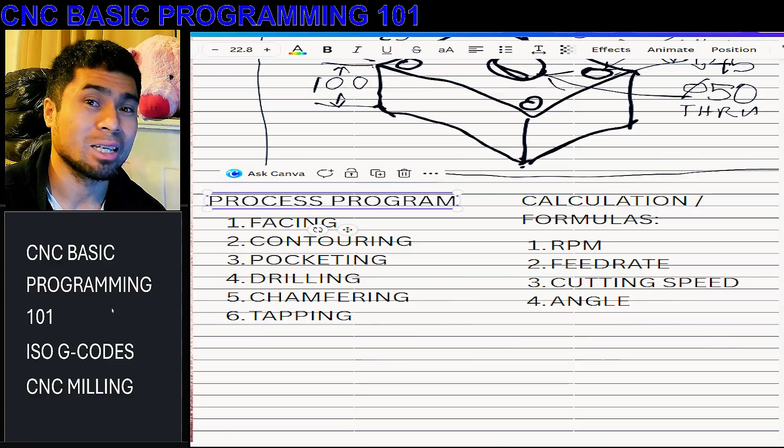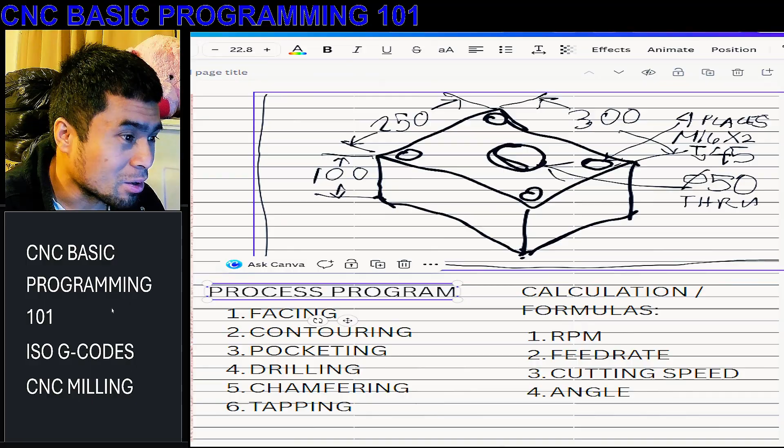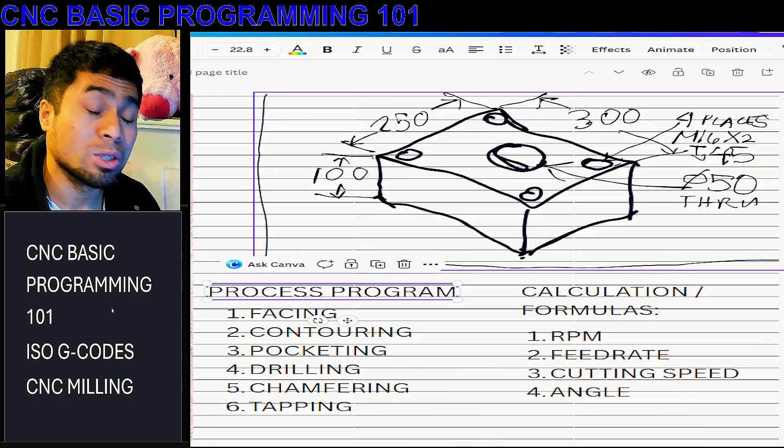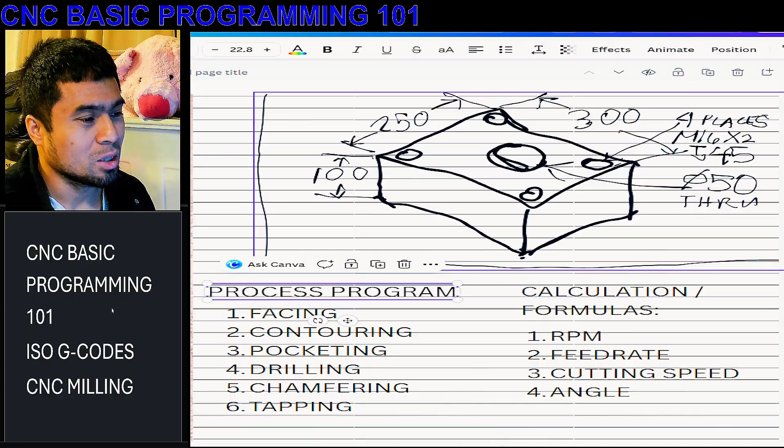So previously we tackled illustrating our sample part, which is this one. Blocks with 300 and 250, 100 height, with 4 M16 by 2 bolt holes, and in the middle a 50 diameter through hole.

And so this is process program, or probably let's change that to program operations. So I'll replace that one, like program operations. So whatever you want to call it, but it is called operations. So there is program operations.

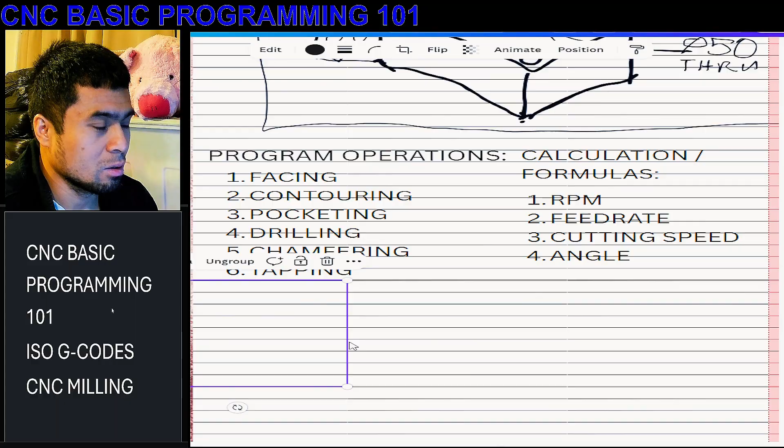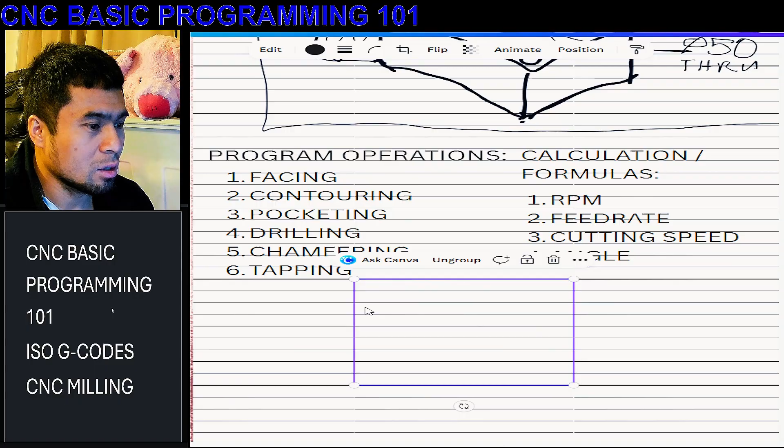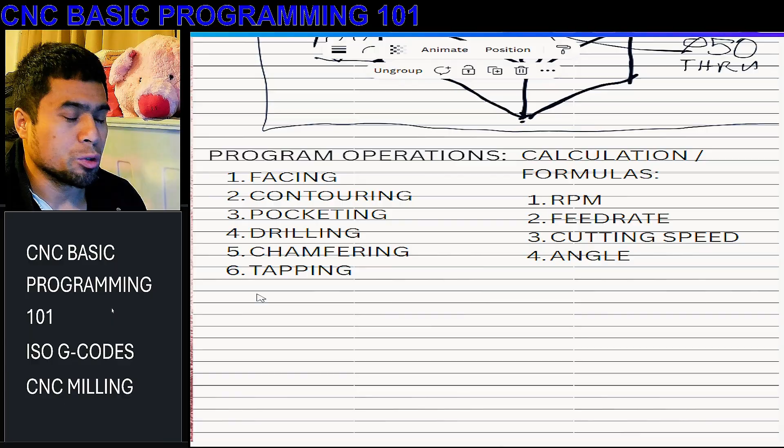Oh, yeah. Then that, what is that? How to remove that one? Like this probably, or like this probably. Okay. I'm still trying to get used to it, because sometimes I can still.

Okay, so let's call it program operations: facing, contour, pocketing, drilling, chamfering, tapping, and formulas. So you can learn about RPM, feed rate, cutting speed, angle. So let's include, because we are also doing tapping.

Why this one is... It's just all duplicated. Make it bigger. How to make it bigger? Like that? Oh yeah.

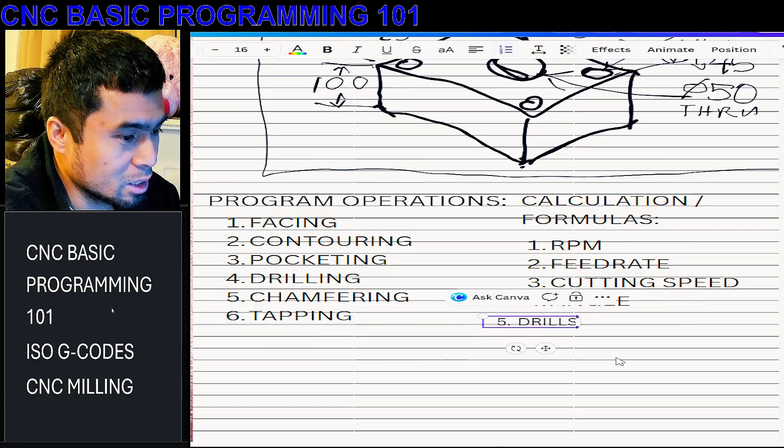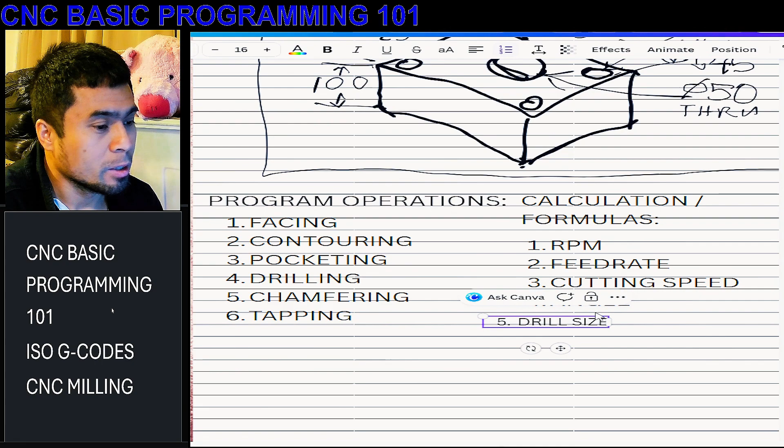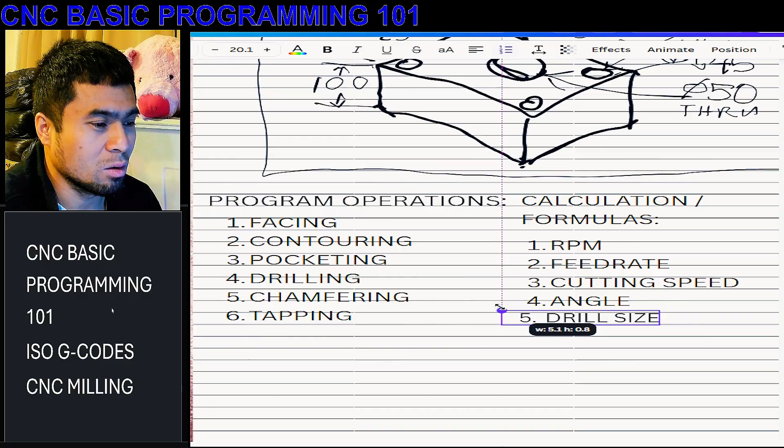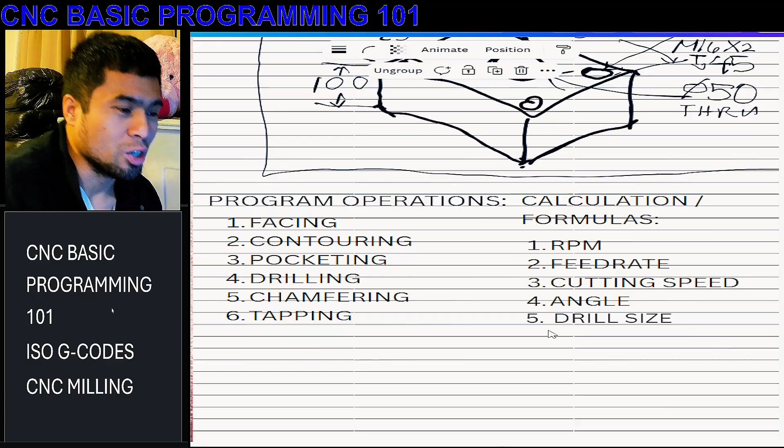So number 5, because we're doing tapping, probably calculation of tapping, our drill size diameter. How to calculate drill size in your tap. Let's transfer it nearby somewhere here and make it a little bit bigger so you can easily read it. How to get the drill size, diameter of your drill when you're doing tapping.

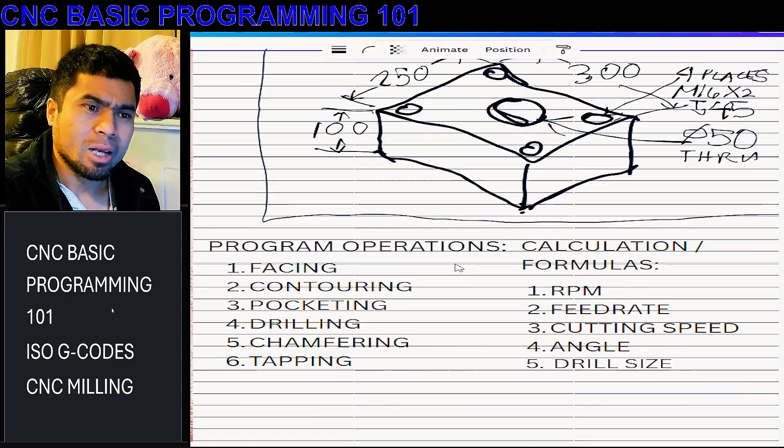So now, before we start the program operations, I want you to understand first, because when we start doing those program operations, you need the values, right? What value are you going to put in your X, Y, Z. If you don't know how it works, or what is the right value you are going to put, like is it positive or negative, it's hard for you to do the programming.

So that's why before we start these operations, facing, contouring, I want you to understand where these values come from, or what is the reference, what is our basis for these values that we are going to put in our programs, right?

Just wait a moment, I'm just going to check my phone. So because as you can see, yeah, so.

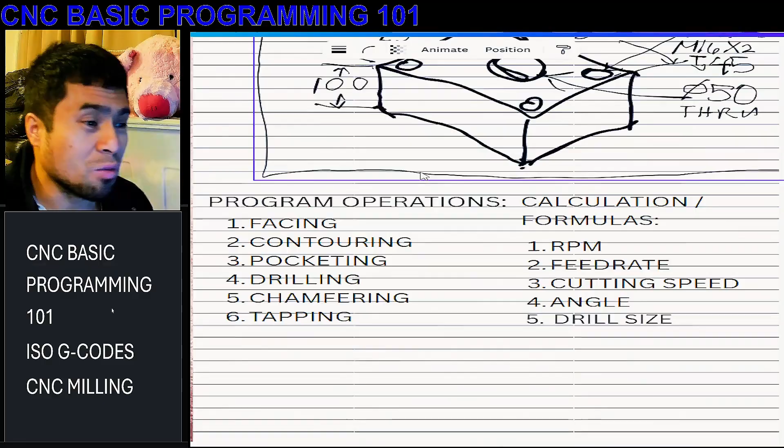Before we start the programming, I want you to understand first how we are going to define coordinates. Because basically, CNC programming and CNC operations is composed of, one of them, coordinates. But you cannot understand how the coordinates work without understanding the one that I want to show you. Let's move on to the next page here. So we are on page 2 now of that drawing.

I want you to not just know, but really understand how it works. This is called the Cartesian plane. What is that Cartesian plane? You cannot make a program without understanding the Cartesian plane. Others call it a quadrant, if you are more familiar with that. I'm using my own terminologies, but it is called the Cartesian plane in mathematics. So the Cartesian plane is basically a quadrant.

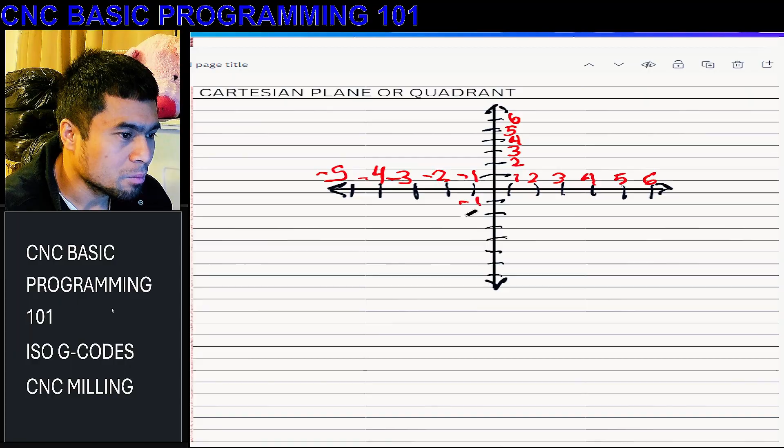Then this one also. Let's, one. Oh no, this is two. Two. Because I draw it small, so it's really hard. Okay. Here on the other side. One, two, -3, -4. Etc. Where's the negative? Where's the one here? Okay, one.

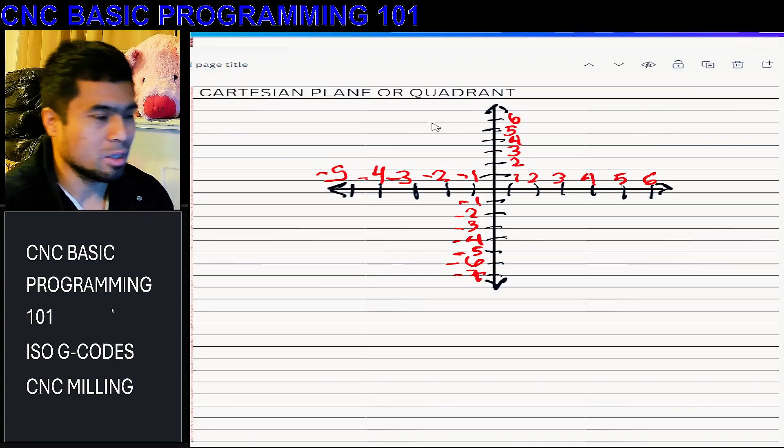And I want to change probably the color. How to change the color? Probably green. So this one is, okay, readable. This one is positive X. This one is positive Y. This side is negative X. This side is negative Y.

Then normally for the Z, it's just normally crossing, but it will get messy when I include the Z. But normally the Z is going somewhere, crossing somewhere like here. But anyway, the Cartesian plane will read like this. When you go from the middle to the right, example this one that I'm showing you, your number is going to the right, so the value is positive x. Example, you're going to 5 from the middle, so your x value is positive x.

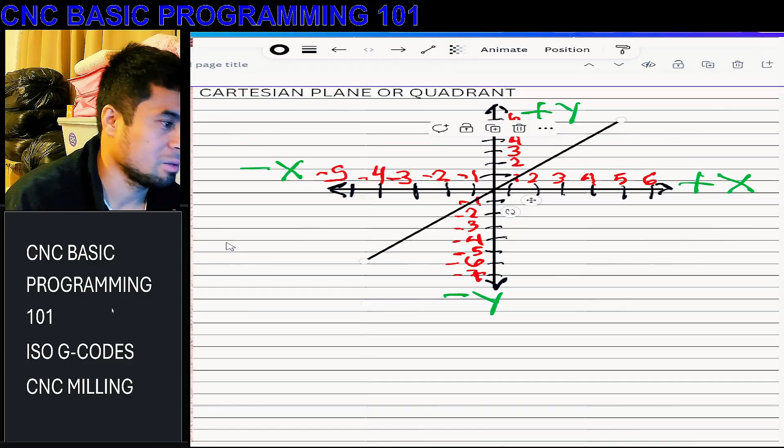And of course, the z axis is when you're going up from the middle, it's positive. Let's include it now. I'll just rotate it here to 45 degrees and move it there. And I'm going to draw again. So I'll put number 5. So this one is the z-axis. Let's label it as z-axis. So when you're moving up, it's positive z. And when you're moving down, it's negative z.

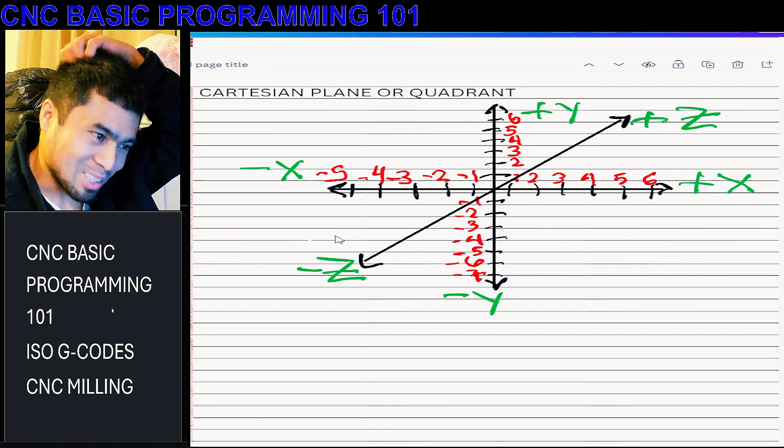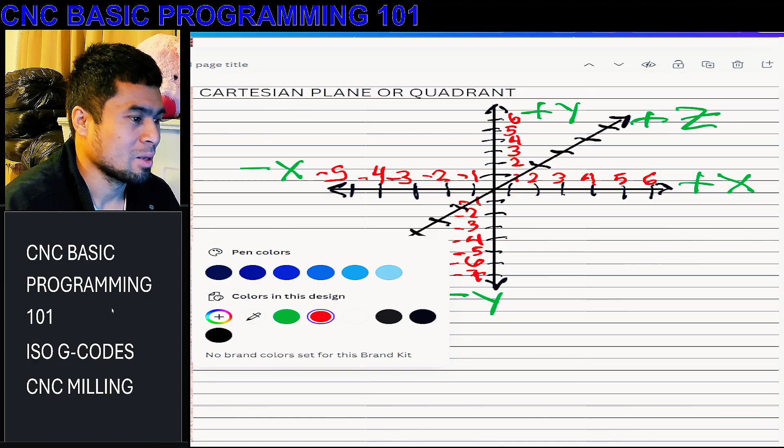And the same way with the other one. I will try to move a little bit quicker because our time is already moving quick. So I'll put also example numbers. So this one is also -2, -3, -4, -5.

So there it's 1, 2, 3, 4. Positive, it is positive. So yeah, did you read it? My drawing is quite small, but I hope you get my illustration.

So instead, if you're going up, you see this one, from the middle. If you're going up, the value is positive. From the middle, if you're going down, the value is negative. That's why you see negative 2, negative 3, negative 4. So what is the application of this in our CNC programming or CNC machines?

So basically, this quadrant, this middle one, is your coordinates. I'll draw the symbol of coordinates. I'll use black, and probably just number 3 so it is not so thick. So the symbol of coordinates is like this: circle, circle in the middle, and highlight those. Oops. That's the symbol of the coordinates.

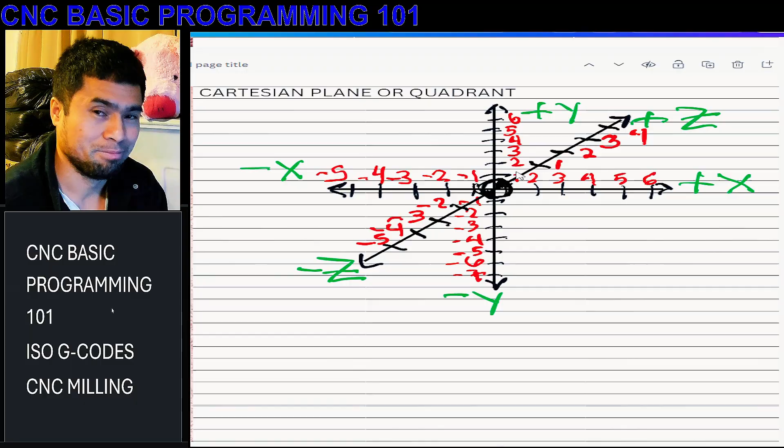So what is the application of this in our CNC programming? Imagine this. Put this illustration, this Cartesian plane, in your imagination. Close your eyes and imagine putting it at whatever starting point you want. For example, we already have our sample drawing, this one. Because this is an isometric view, the one I drew, let's go to the top section of this sample drawing.

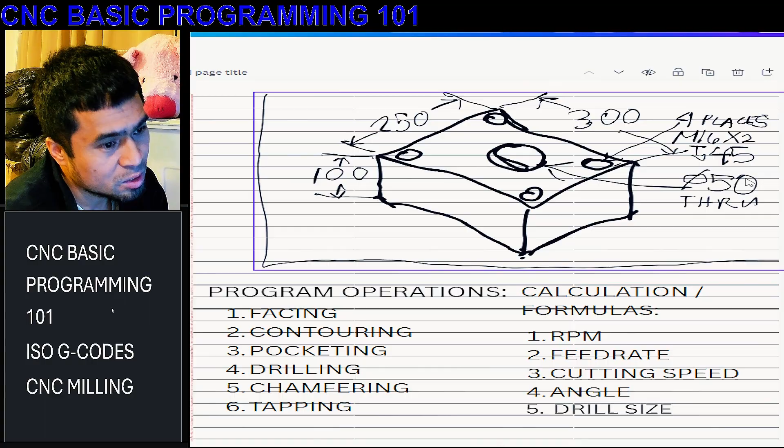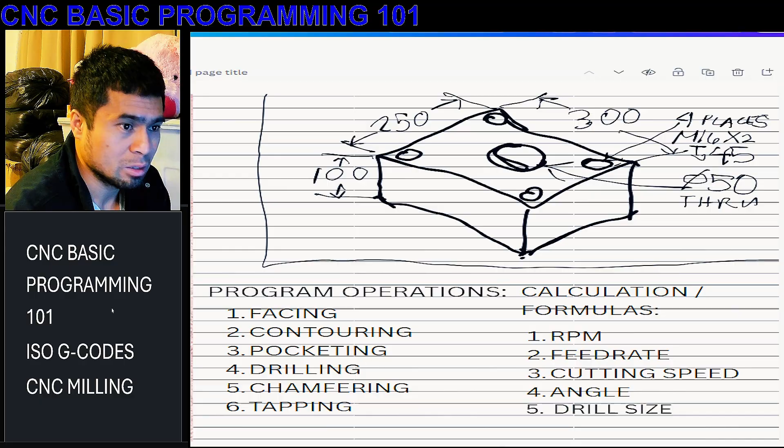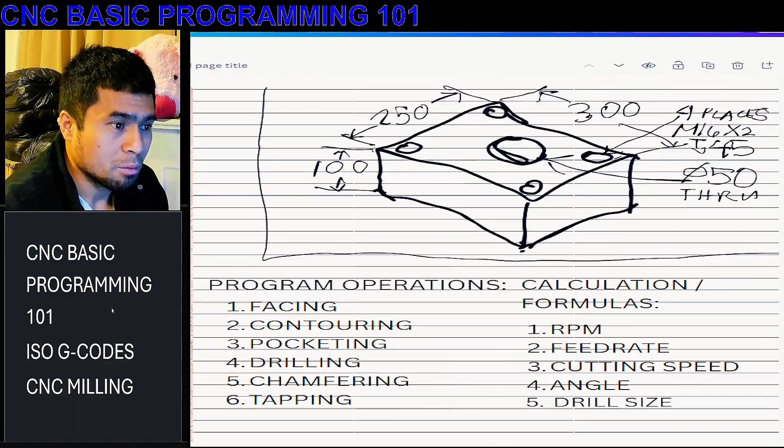So when I draw the top, diameter 50, anyway, that's all right, from our previous video. Let's get the top. So how does this Cartesian plane or quadrant work? Let's get the top of that drawing and draw it again here. I think I used 8 on that, or 5, I don't know. Let's say 8. Oops, 8 is very thick. Let's use 5.

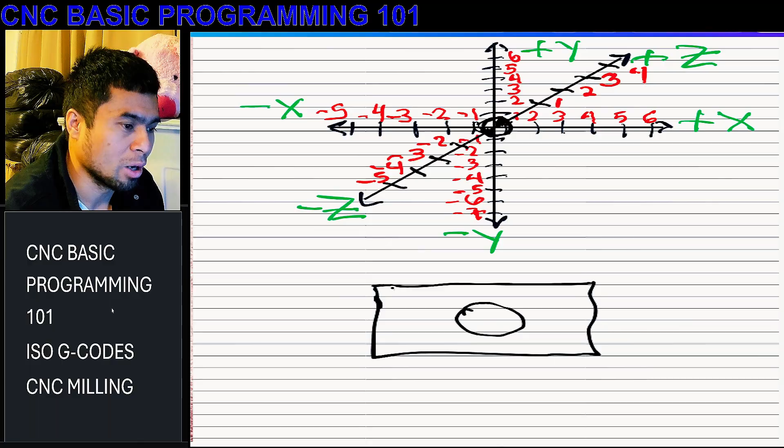So how does the Cartesian plane apply to programming? Let's get the top view of that sample drawing, and we have a circle in the middle. Not so good, but yep. And we have 4 M16 on the corners. So that is the top view of our part, right? So how does this Cartesian plane apply? That's why I want you to understand how it works.

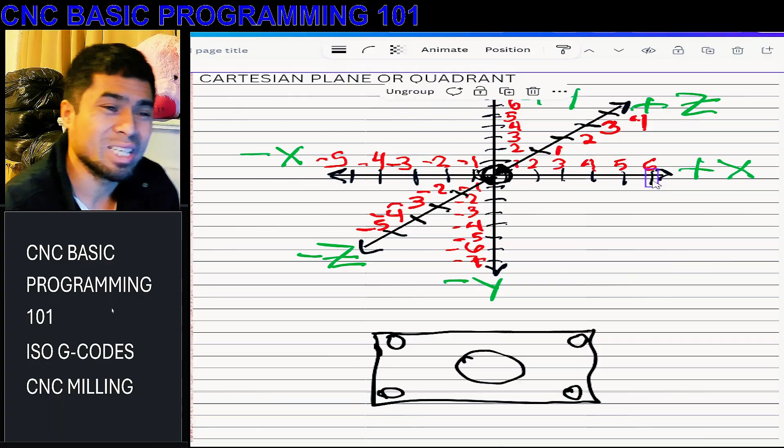Because if you're a machinist, you have to decide where your origin is. That center one I told you about is called your work coordinate system, and its symbol is like that. In short, that is the origin. Origin means your X0 and Y0. Please imagine negative 1, positive 1, but your middle is 0. Positive Y 1, 2, and negative Y 1, 2, 3, 4.

Your Z is plus 1, plus 2, plus 3, and also negative 1, negative 2, negative 3. And your middle is X0, Y0, Z0, right? So that's exactly your origin, your work coordinate system. That is your desired origin or coordinate system. So how does it apply to the actual part?

Imagine you decide, oh, I want my origin to be in the middle of this job. For example, I want my origin here in the middle. That dimension is around 300; I think it is 300 by 250. So I want to put my origin in the middle of this part. So that one is your origin, right?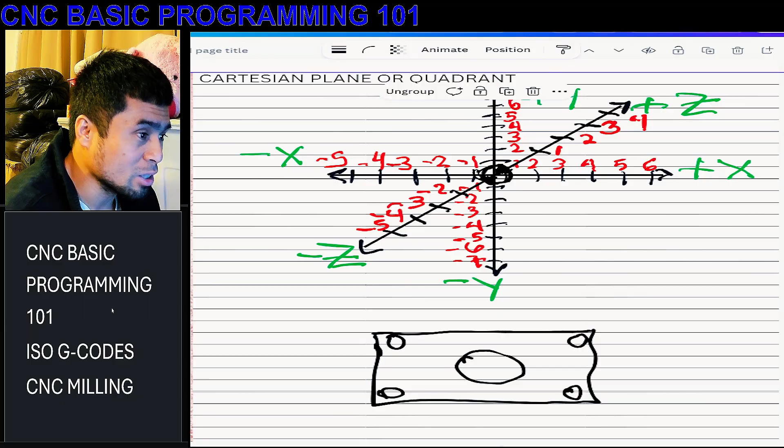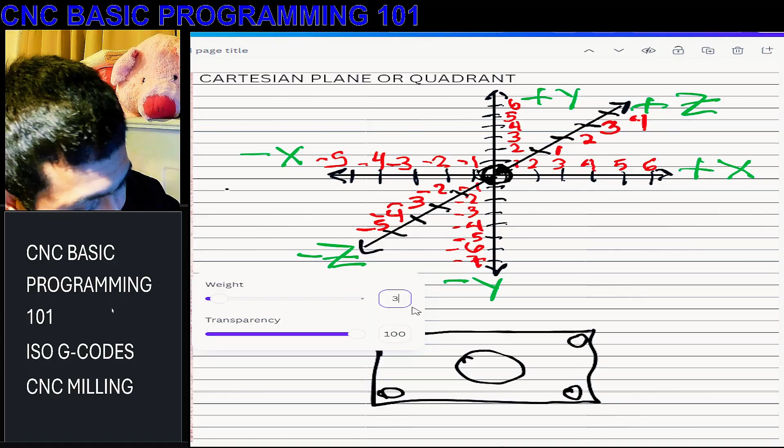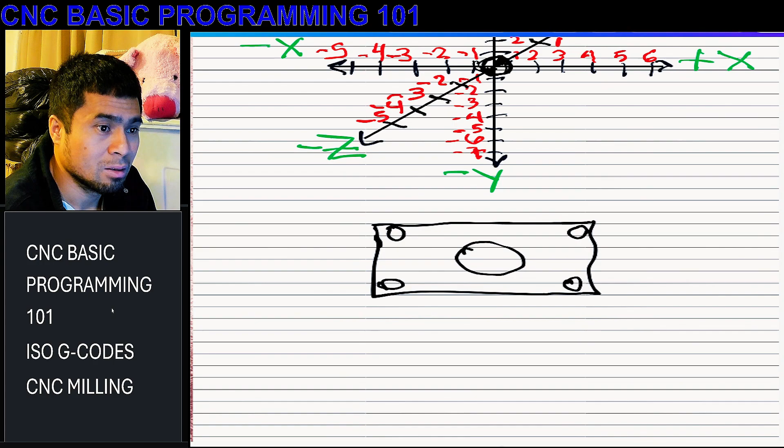So your illustration should be like this. I'll use a smaller one, probably 3, so at least you can see it. If you decide your origin should be there, oops, too much, because I still want you to see the name. Yeah. If you decide that your origin will be in the middle, draw your Cartesian plane there. Is it the middle?

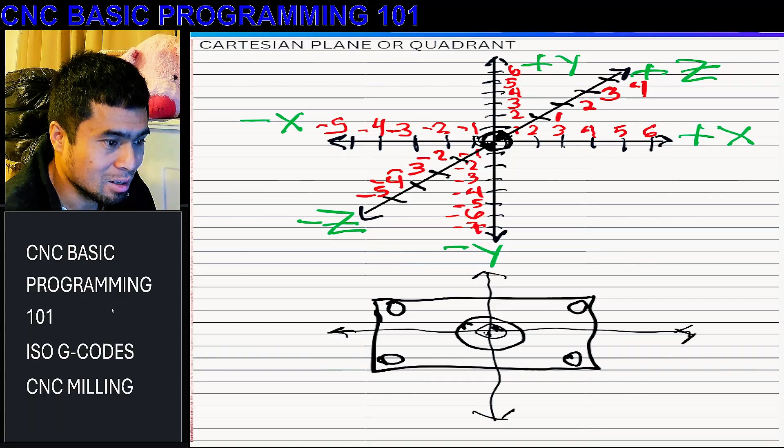Draw your Cartesian plane there, because your origin is x0 y0, that middle. So draw your origin there, meaning that is now your x0 and y0 origin. So this is your plus y. This is your negative y because you're going backwards. This is your positive x because you're going right. And this is your negative x.

So from the middle of your job or your part, which is your origin, all the values going left are put as negative values in your program. And all the values from the middle to the right should be put as positive values. The same way in the y-axis, all the distances from the middle going up are positive. The same way, all the values from the middle of your part going backward are negative values in the y-axis.

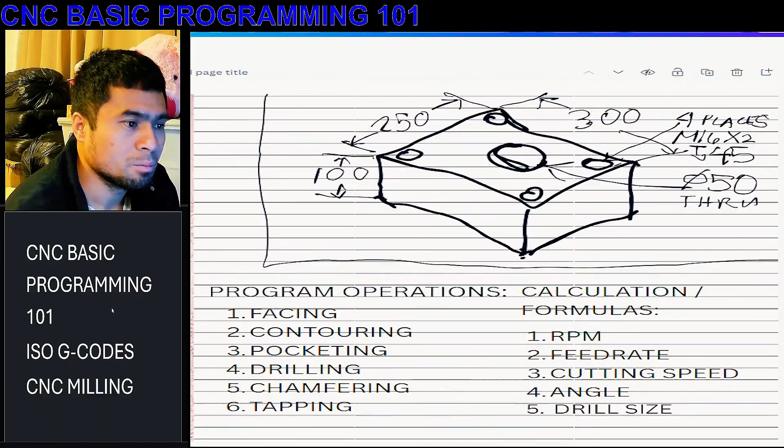So that's it. Example, what is the dimension of our example here? I think from the previous, let's see at the top. So from the top, it's 300 and 250. So meaning, if we put dimensions here, this is 300 and this is 250. Oh, why was the x gone here? Okay.

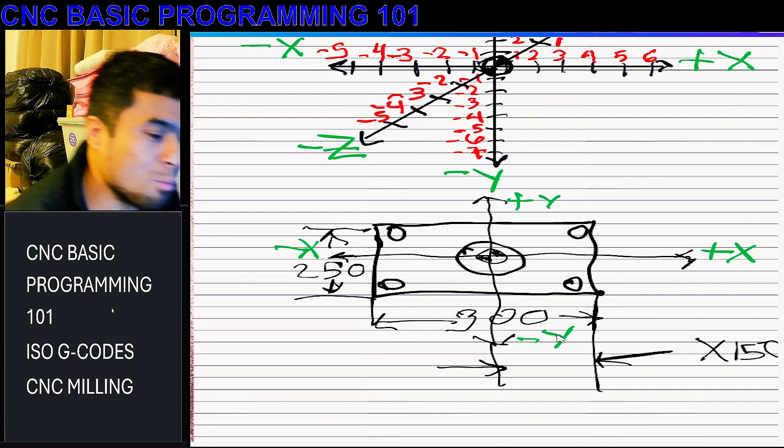So if this is 300 and this is 250, that corner is how much? Because your origin is on the middle, half of the 300 is 150. So from the middle to this end should be 150, right? X 150. Oh, it's not readable anymore.

Where did the 150 come from? Half of 300, because your origin is in the middle, right here. But what is the value? Is it positive or negative? Positive, because you're going from the middle to the right, and that direction is positive. So that's your positive x on this corner, specific to this corner. That is your x positive 150.

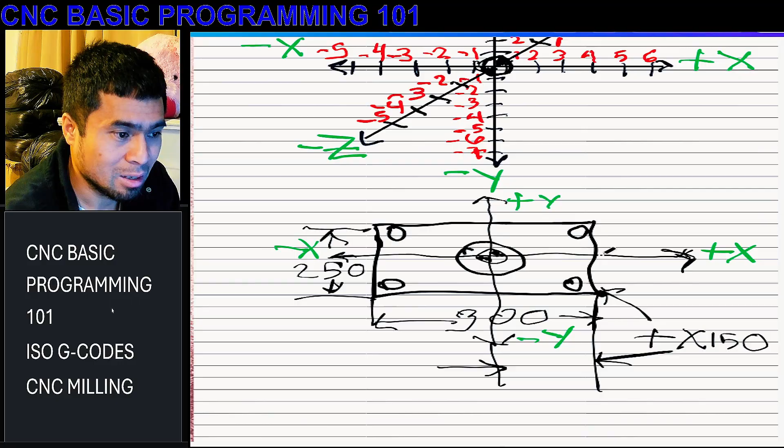How about your y? What is the value of your y from that middle up to this corner? Your y is here. What is that value? I'll make it more clear. Your y is the distance from the middle to this end, so half of 250, how much? Y negative. Half of 250 is 125. This distance from the middle of the job to the end point of your part is 125.

But what is the value? Is it positive or negative? Negative, because you're going from the middle backward based on your Cartesian plane. From the middle going backward, the value is always negative. So that is y negative 125.

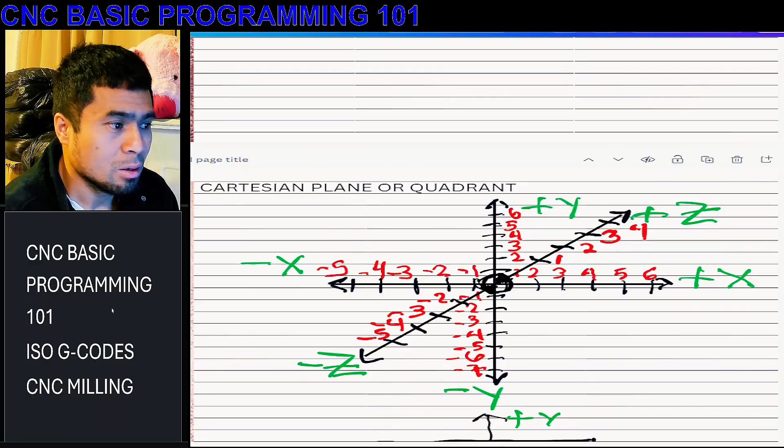So that illustration defines the real use of the Cartesian plane in our CNC programming, the values of the axes X, Y, and Z. Whatever the direction, there is a corresponding positive or negative value, which defines the standard direction for the Cartesian plane or the quadrant, whatever you call it.

So now that you understand how the Cartesian plane works in our actual part, you can program every part. You know what value to input in your program, because you understand the origin, which is your work coordinate system, the middle of your axis, and second, the direction of your axis, whether it is positive or negative. That is the application of the Cartesian plane in our actual part.

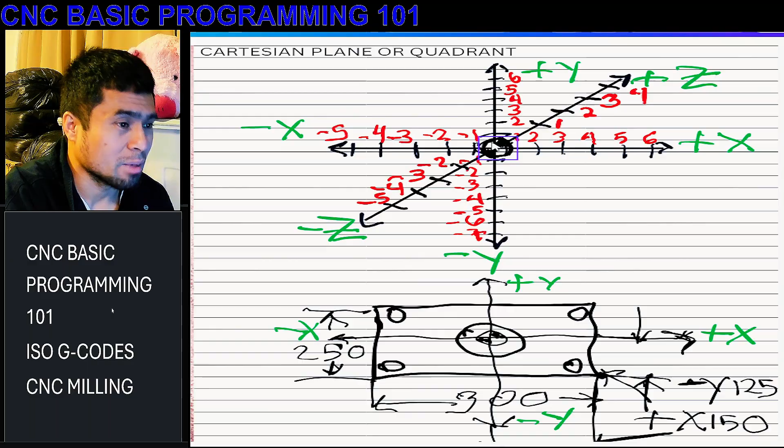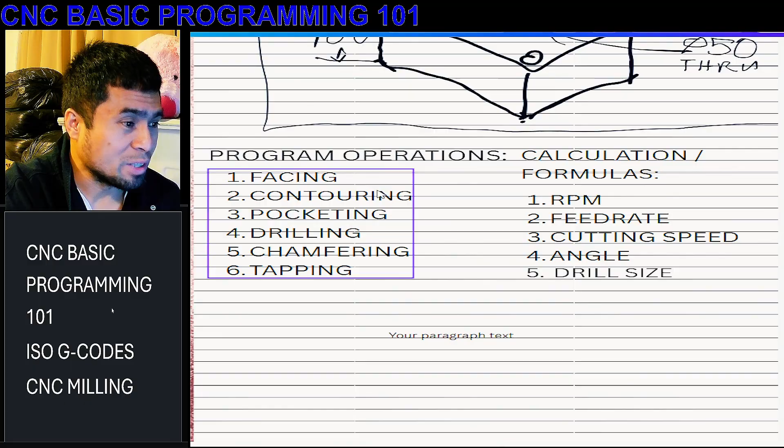We will tackle this in the middle of the programming, because you might ask, what is this origin in the application to the machine? Although I showed you how the values are inputted when you program the part, in actual use that origin specifies the center of your movement from your machine origin, which is the WCS, work coordinate system. We will tackle it more in the actual programming for the operations: facing, contouring, pocketing, drilling, chamfering, and tapping.

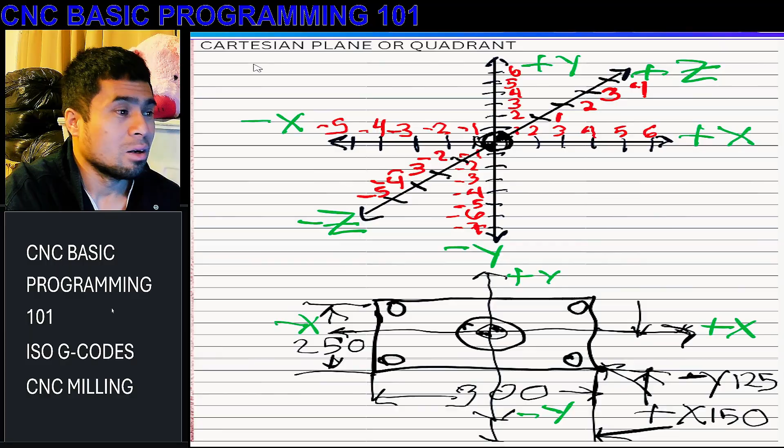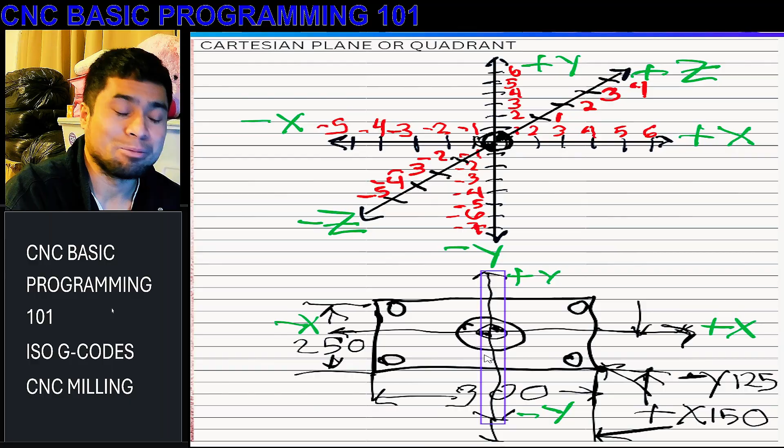All good? I hope you understand the Cartesian plane or the quadrant, its function, and how it works in actually programming parts: what value to put, positive or negative, and also the movement, whether going forward, backward, up or down. If you understand the Cartesian plane, you can understand what details to put in your X, Y, and Z values when you're doing the program. All right?